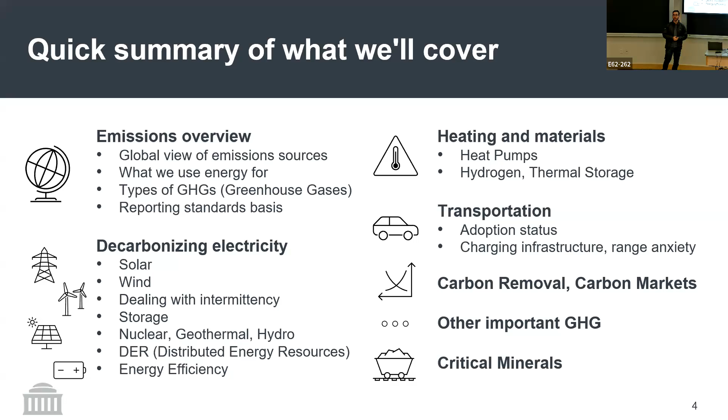And then I'll go into 3 topics that I think are really important. We don't have a lot of time to talk about them, which are carbon removal and carbon markets, then other greenhouse gases, which I think are something that is under-talked about and underappreciated. And then critical minerals, which is something you'll probably hear a lot when you're talking about the energy transition. So first, some context setting.

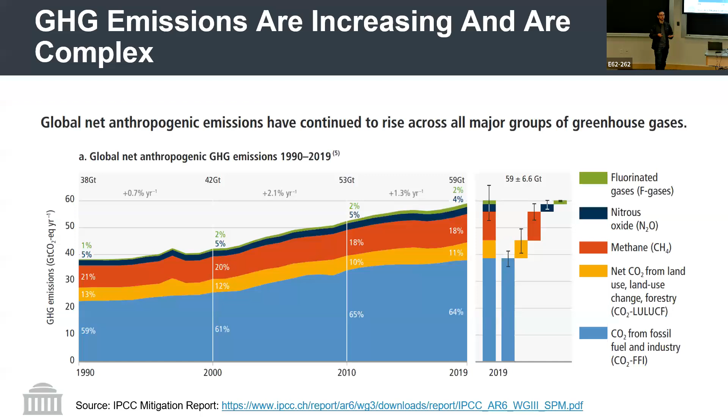So it's really important to get some idea of what we're talking about when we talk about the energy transition and have an idea of scale so that you can say, okay, somebody's talking about kilotons. Should I care about this? Probably not. Or not that much, right?

So it's important to have an idea of where these emissions go. But this is, how do I say this? It's difficult to get one single way of breaking down emissions. So you'll hear different numbers, and if you try to add them up, depending on how it's cut, they don't add up because things that are used for heating then go into industry, so you can double count and so on.

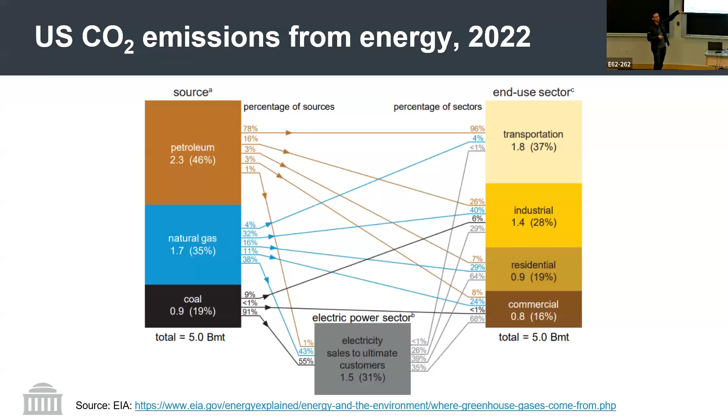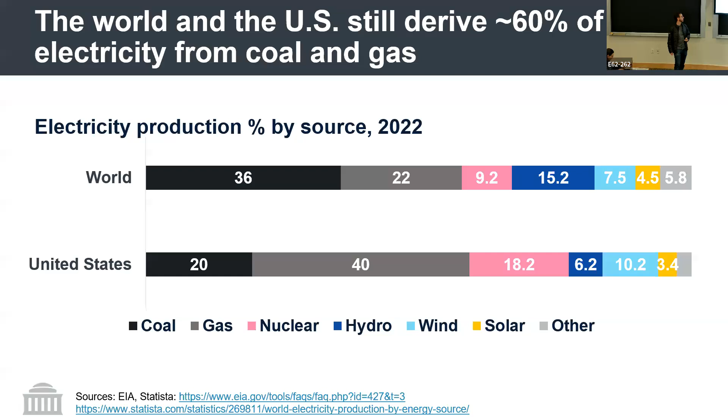Okay, and then one other point that's really important for context setting is understanding scope 1, 2, and 3. And this might be preaching to the choir here, but it's really important for you to have an idea when people talk about scope 1, what does that mean? In general, scope 1 is whatever the company itself is burning. So if you buy gas and you burn it, that's scope 1. Scope 2 is the energy that you buy.

So when you buy electricity, when you buy steam, that's scope 2. And then scope 3 is everything else. And what is everything else? It is if you're a manufacturer and you buy from somebody else, the carbon that's embodied in that stuff that you're buying is scope 3. And then when you sell to somebody else and they use your product and that creates emissions, that's also scope 3. And this is really important, especially for some industries.

So for example, if you think about a company like Exxon or Shell, they sell stuff that other people burn, right? So that's scope 3. So when Shell says that they have a net zero goal for scope 1 and 2, that doesn't really include the biggest source of emissions, which is their scope 3. Same thing for GM. GM might say, we're going carbon neutral, but if they say we're going carbon neutral for scope 1 and 2, then they might still be producing ICEs, or internal combustion engines, which people are going to use and burn diesel or gasoline to run.

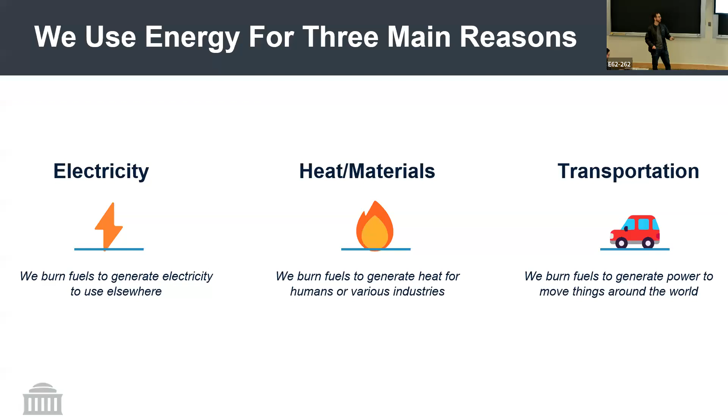Then a ton of CO2 is a ton of CO2, and the difference from a ton of CO2 to a ton of CO2 with an E is that this is CO2 equivalent. So when you talk about methane, you can convert tons of methane into tons of CO2 with a conversion factor, which will depend if you're looking at 100 years or 20 years, but that's another can of worms. But it's important to understand the distinction between the two.

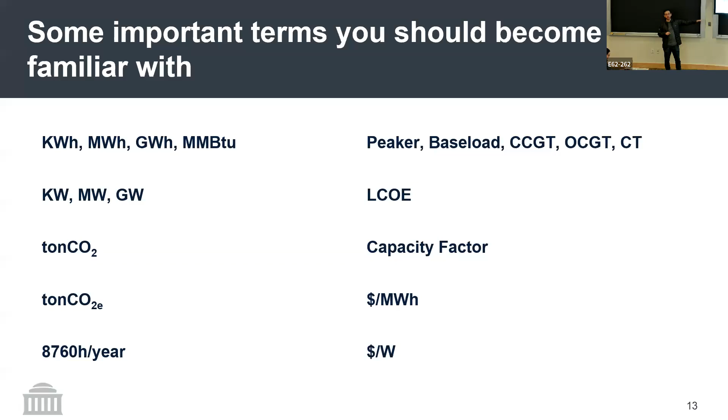And then dollars per megawatt hour, it's important to have an idea of what's cheap and what's expensive here. This is usually LCOE. And then dollars per watt is like, when you talk about solar, for example, you hear that solar costs something like $1 per watt. That's per watt of installed capacity. And then if you want to get from that to how much electricity is being produced, then you need the capacity factor. So anyway, that was very fast, I know, but these are terms that you probably are going to hear a lot about, and it's helpful to have an idea of what they mean.

Okay, so going into solar. And this jacket is warmer than it looks.

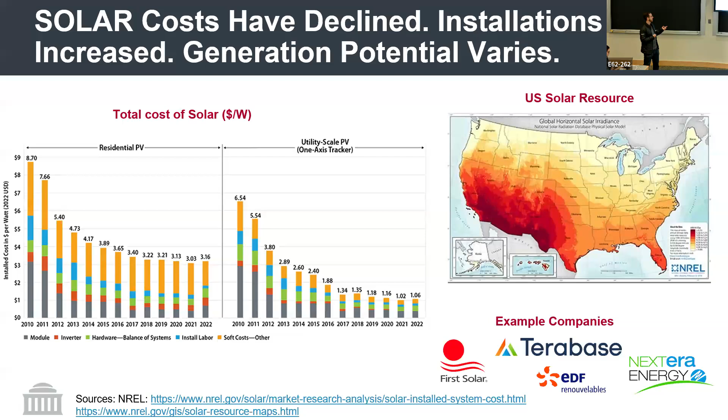And then what you do is you levelize this cost. It's going to cost about $1 million. So you levelize the cost, it's going to be probably about 100,000 per year. And then you divide one by the other. You get to an actual cost, cost per megawatt hour. And then cost per kilowatt hour is 1,000th of that, right? So this is equivalent to like 10 cents per kilowatt hour, is the same as $10 per megawatt hour. Sorry, 100.

Okay. Yeah, you talk about solar in dollar per watt because you can put it in multiple places. In Boston versus California makes a big difference. For wind, you only put it where it's cheapest, so dollar per kilowatt hour makes more sense. Yeah, because for wind, I'm not going to talk about this, but wind is proportional to the wind cubed. So the difference between a place that's a little windy and a place that's more windy is very big. So that's why it's white here.

So the US has 3 regions where you can do wind, basically. There's the wind belt here. That's the greatest wind ever. Really, really good, really, really cheap electricity, but there's basically nobody there. So then it raises a problem with getting this energy from here to where a lot of the demand in the US is, close to the coast. So there's a huge problem with that. Texas is probably a great example because they built a lot of transmission to get this really good wind from the panhandle here. And as a result, about a third of all the wind in the US is in Texas.

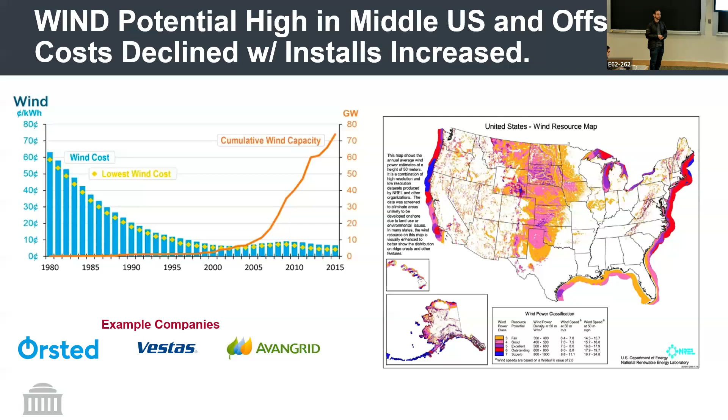The other 2 regions are by the coasts. And the difference here is the East Coast has really shallow waters, so you can do offshore wind more easily. So most of the offshore wind developed in the US is there. And then on the West Coast, there's also pretty good wind, but then you have to go to deeper waters, so then you need floating wind. And basically the difference is onshore wind is great and it's really cheap. Offshore wind is really expensive, and floating offshore wind is insanely expensive. So it's hard to make the economics work, and that's why a lot of the offshore wind is being driven by policy.

Okay, so you're going to hear probably 100,000 times that the wind doesn't always blow and the sun doesn't always shine. Seriously, it bothers me. And there's a lot of ways to deal with that, right? So here I'm mentioning a few. Load shifting or demand response is basically you pay somebody to not use electricity when you don't have electricity. So for example, if you're in California, you charge your car during the day, when there's a lot of solar, versus during the night, when there's not. That's probably the cheapest way that you can deal with intermittency. But it's hard because then you need people or companies to change their behavior, right? So you have to really incentivize them to do that.

Then there's storage, obvious, right? You have a battery or you have a pumped hydro plant, you store electricity for when you need it. And I'll talk a little bit about that. There's transmission, which is great and impossible to build. Seriously, really, really hard. Because in general, people don't want it near them. And even in very rural areas, there's a lot of resistance to that. So you're going to hear a lot about this as well. NIMBY, not in my backyard.

Then you can have dispatchable or firm resources, and this can be a lot of things. One, it can be just keeping some of that gas for running 5% of the time when you don't have electricity. It could be having nuclear or geothermal, and I'll talk a little bit about that. Or in the limit, it could also be making hydrogen and then burning it, but that's currently really, really expensive. And then the last one is just overbuilding the renewables, right? A lot of people talk about renewable energy being curtailed as if it's necessarily a bad thing, but it can be a normal thing, right?

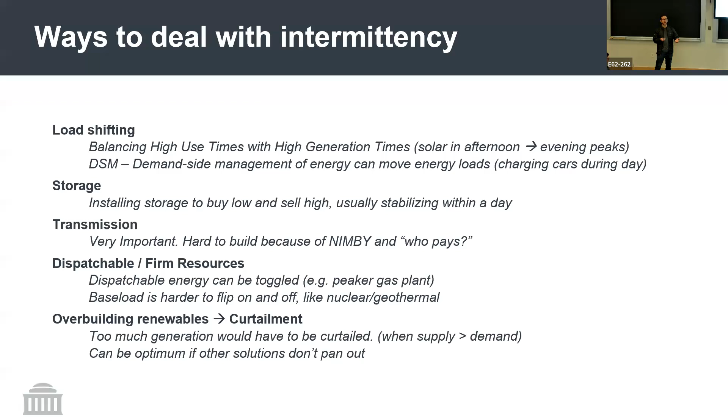Because if you have a grid that's fully decarbonized, it might be better for you to build a little bit more solar and just curtail it at some times, and then you have enough for when you need it.

Right, so going a little bit into storage, storage is very important and it's being deployed a lot right now. And there's 3 technologies that are widely deployed. The first one, where most of the deployment today is happening, is lithium ion. And this is mostly LFP, or lithium iron phosphate, which, important to understand, has no cobalt. When you hear about the whole cobalt thing, that's with another lithium ion chemistry that's usually used for cars. So I'll talk a little bit about materials later.

Then there's pumped hydro, which is interesting because most of the pumped hydro that we have was built in the 70s and the 80s, actually to accommodate nuclear in the grid. And pumped hydro simply works: you have a reservoir in the bottom, you have a reservoir up a mountain, and when you have excess electricity, you pump water. When you have a need for electricity, you let it go down and spin a turbine.

And then there's compressed and liquid air, which are smaller right now, but are promising technologies, and there are some pretty big batteries that are built with this. And basically what you do is kind of obvious. You compress air, and then you let it run through a turbine when you need electricity. And liquid air is pretty similar, but you cool it down enough so that it's liquid, and then you need a lot less storage versus compressed air for the same amount of electricity.

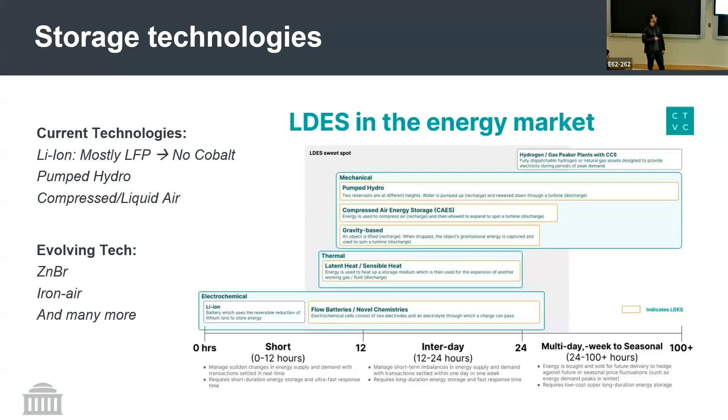Cool. Then there's firm carbon-free generation. And here there's basically nuclear, geothermal, and hydro. Nuclear is great, and we should definitely keep the nuclear that we have going. But building new nuclear is crazy expensive. So there's people developing new technologies that they say could become cheaper. And that's to be seen if that's going to work or not.

The challenge here is also that it takes a very long time. There's a huge amount of regulation around nuclear. So even if this tech works wonderfully, it will probably be another 10 years before we actually see one of these. But there are some really cool companies working on this stuff.

Then geothermal: basically the core of the earth is really hot. So if you dig a hole deep enough, you're going to find hot stuff that you can use to produce electricity.

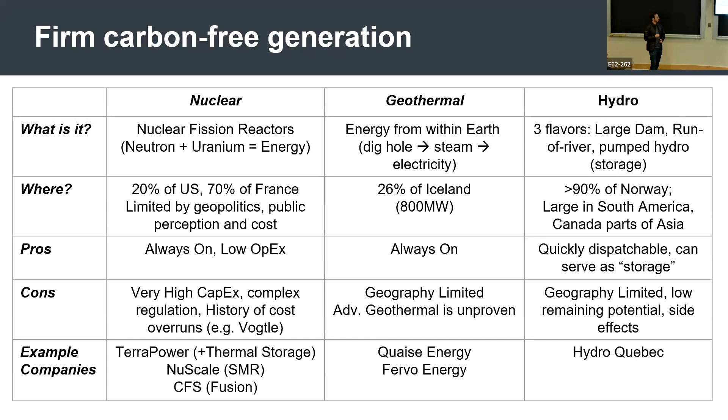And then there's also run-of-river that's relatively new. So instead of building a huge dam that floods a big area and you have to displace people, you just let the river run and do a bypass. But again, most of the resources are already tapped into. Okay, so now, like this is a lot.

And this is important because you're, again, going to hear a lot about technology. And it's important to set the context where having new technology is really important. So it'd be great if we get cheap nuclear. But it's very unlikely that we won't need a lot of solar, wind, and batteries. So we should definitely start building now. So that's the main message that I want to convey here: we definitely need to be building faster.

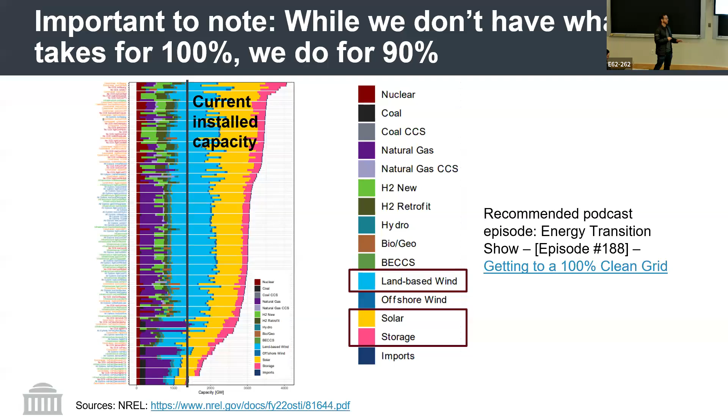Okay, and then just to mention this so that you know that this exists, when people talk about DER, that's distributed energy resources. And this is as opposed to the traditional grid, quote unquote, which is you have generation, then transmission, then distribution, and then you get to customers. That is the way that the traditional grid works. And with DER, you enable the customers to also produce electricity or to also have energy resources. So that can be a battery or something like that, which integrates to the grid as a whole.

Well, 2 points here. One, people talk a lot about this with the advantage of giving power to the people and enabling them to have ownership on this. There's also arguments to be made on resiliency and so on, and then fairness. But one challenge is that in general, things that are on the customer side are more expensive, right? So just because of economies of scale, if you put 5 solar panels, it's more expensive than putting 50,000 on a field. So that's a challenge that needs to be overcome.

And the other thing is finance, because financing a small installation is generally very hard, because how do you get assurance that the person is going to pay you? So a lot of what's being deployed right now is with richer people who have the money to install this themselves.

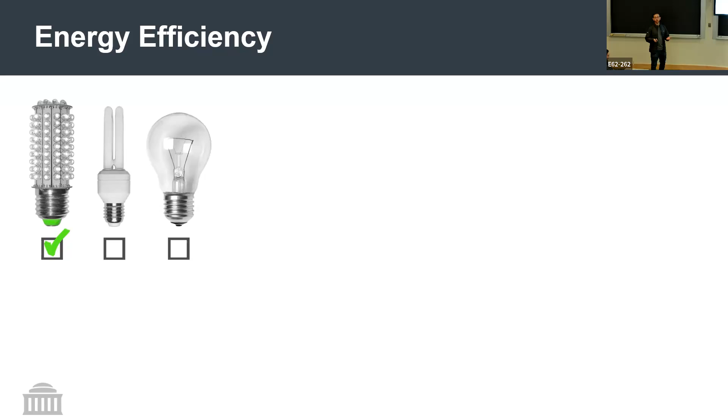So it annoys me a little bit. A lot of the lights at MIT are fluorescent light bulbs. And that goes to show that it's hard, right? It's hard to get people to change. And even when it's an institution that has a lot of money and goes to decarbonize, it's still not something that's automatic, right?

And then there's also things like revolving doors. I'm excited that they're back to work here, they weren't last year. And double pane windows and heat pumps, things like that. That can all increase efficiency of houses, and it's really, really important to move to these solutions. And then the last point that I'll mention on energy efficiency is the behavioral side of getting people to change. That's really, really hard.

So getting people to turn off their AC, or if you're going to buy a vehicle, it's much better if you can drive a smaller car. When I got to the US, I was shocked at the size of cars that people drive here. But one thing that I was also shocked by is that a lot of this is actually driven by policy and by regulation. For example, if you have a pickup, you can get some tax deductions that you can't with a normal car. So that's one way that the government is actually nudging you towards buying a pickup instead of a normal car, because then you can get more tax deductions, right?

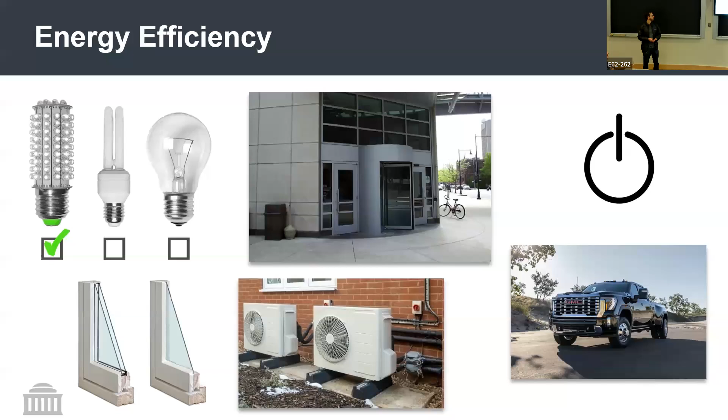And then there's a lot of things like that where you make fuel standards, but then the fuel standards are relaxed if it's a bigger car. So there's one component that is customer preference and what people actually want. That's really hard to change. But then the other thing is, what's the regulation trying to get you to do? Right?

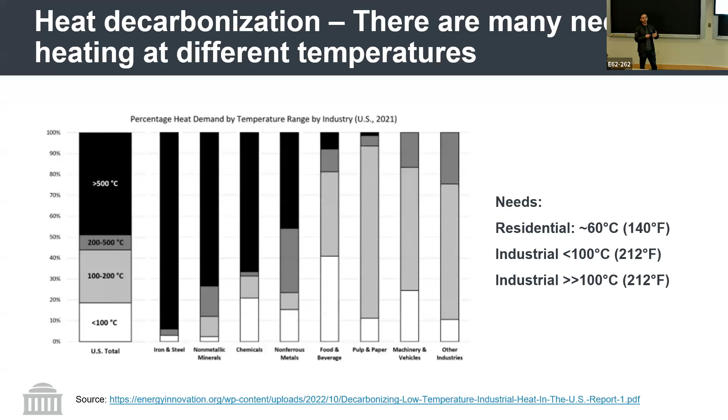Okay, so moving on to heat and materials. Heat is a huge part of emissions. And what's important to see is that there are different temperatures that you need. Here it's broken down between less than 100 C, which is boiling water, and then 500 C, which is maybe 1,000 degrees Fahrenheit. And you can see that for industries, you need a wide range of temperatures, and there are different solutions that work for each of these temperatures.

So here I'm breaking it down by big numbers. Heating for very low temperatures, like heating a house. Then high temperatures, which is a lot of industrial processes, and then very high temperatures. In general, for low temperatures, you should 100% be using heat pumps. And I'm mentioning this on purpose. COP is coefficient of performance, which is a measure of efficiency. It's basically how much heat you get out divided by how much energy you put in.

And because of the magic of thermodynamics, you can actually get more heat because you're taking heat out of the environment. With heat pumps, you can get more heat than you put in as electricity, which is great. But that doesn't work out for very high temperatures. Then there's resistive heating that has a COP of 1, right? You're just running electricity through a wire. You should probably not do that for low temperature heating, but for high temperature, it's kind of what you can get.

Then there's hydrogen, and a lot of people say that hydrogen is really good for industrial processes because it can get to very high temperatures, which is difficult to get with other technologies like resistive heating. Then this is probably my favorite one, which is... oh, yeah. What's the difference between blue and green?

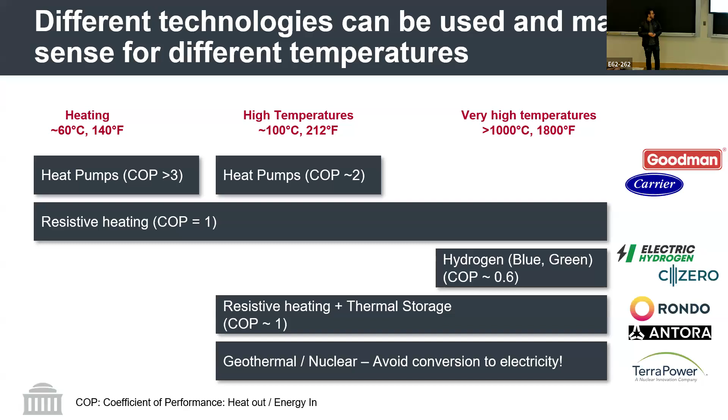And there are some companies that are looking into maybe not using a carbonate, or you can do the same process but then capture the CO2, or you can mix the CO2 back into the oxide, and capture some of that CO2 into the material.

Then there's steel. There's Boston Metal, also very close to here, which is really, really cool. They're trying to do direct electrolysis of the iron oxide. So you heat it up, and then you run electricity through it to produce steel versus the normal process, which uses coal. And then there's aluminum and ammonia. For aluminum, you need a lot of electricity. So that's the main point. You need green electricity. And for ammonia, you need hydrogen. And the hydrogen, again, is produced from natural gas.

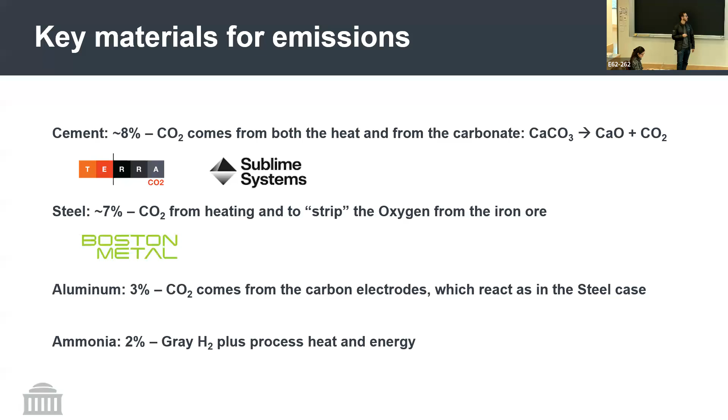And a few things to realize here. One, planes and ships, we have no idea how to decarbonize. That's the reality. There's no economic way today to run this. You would need huge subsidies to make this work. And the challenge is, usually you need very big distances, so you need a lot of energy, and then it's really, really hard to get that much energy from renewables.

So what you could do is maybe do hydrogen and then do CCS and then produce a synthetic fuel that replaces the normal fuels, but that's really expensive. So that one is very, very hard to figure out. Maybe you can do nuclear ships, so that's exciting, but we'll see.

For cars, though, we definitely have a solution. That's pretty obvious. EVs. Some people are still trying to do hydrogen cars, which is a crazy thing. I do not understand why. Because, I mean, from a cost basis, EVs are just better.

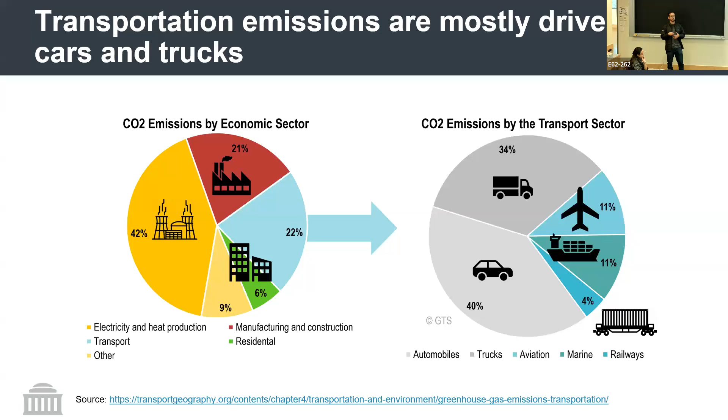For trucks, sorry about the rant. For trucks, that one is really hard still. You can do a truck EV. The challenge is that in general, batteries are really heavy, and the further you need to go, the heavier they become. And for trucks, the weight is really, really important, because how much weight you have determines how much you can carry, how much money you can make.

So just going over quickly to EVs, two things important. A few countries in Europe are really adopting EVs very fast. China is surprisingly adopting EVs like crazy. If you look at China, about 22% of cars being sold there are EVs. And in the EU, it's even less, if you look at the EU as a whole. In the US, it's like 7%.

And a lot of it is because of range anxiety. In the US, people really like to travel on the highway system and so on, and there isn't a lot of charging infrastructure. The IRA has a lot of money that's going into that, so that's exciting. Maybe we'll start to see more and more EVs being adopted here.

Nice. Okay. Then going to my others category. The first one is CDR. Here I'm just throwing a bunch of acronyms, and it's important to at least know what these technologies are. When people talk about CDR, that's carbon dioxide removal, which is taking carbon out of the air. There are a lot of technologies that can do that. First one is BECCS, bioenergy carbon capture and storage, which is you burn some kind of plant, and then you capture the CO2 and you put it underground.

Then there's DAC, direct air capture, which is getting CO2 directly from the air and then doing something with it, which is really, really expensive today and needs a lot of energy. So there is a lot of research that needs to be done to get that down.

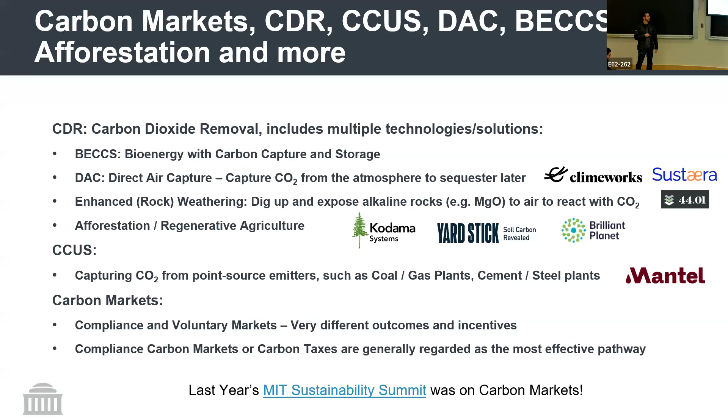If you want to learn more, last year's Sustainability Summit was on that, so you can go see that. Okay. Then there's non-CO2 gases. Three things that I'll say here.

First, methane is really, really, really important, and we talk about it way too little. It's about a third of global warming today, and the good thing about methane is that if you stop emitting it, it reacts with the oxygen in the atmosphere and produces CO2, so it goes away in about 20 years. So it would be great if we did that.

But it also has a lot of sources. And here, the three big ones are fossil fuels. What's the name of this? Like a dumpster? Landfill, thank you. So there's landfills. Basically, when you have a lot of organic matter reacting without oxygen, it produces methane. And then a lot of places you collect that and you burn it, which is much better because then you break it down into CO2, which is a lot less warming.

And then the third one is agriculture. And this is mostly cows, but also rice is a big source. But yeah, cows are huge. I think if cows were a country, they would be the third biggest after the US and China.

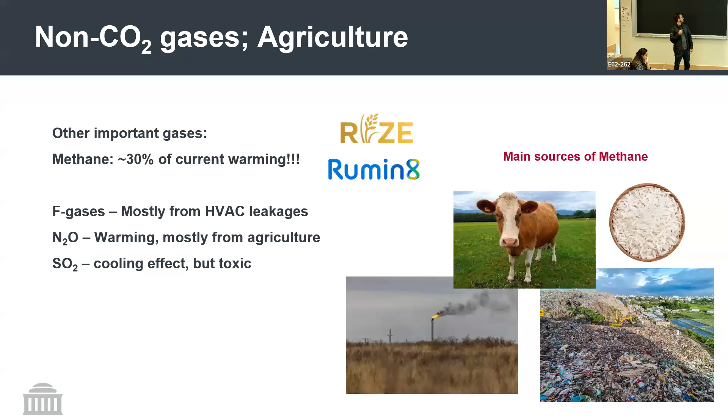And then there's other gases as well, F gases, I mentioned nitrous oxides, and then there's SO2, which has a cooling effect, but it's toxic, so not great. Thankfully, we're getting away from this. This is mostly coming from coal and high sulfur petroleum, which some ships burn. But there's fuel standards to get that out.

Okay, and then there's materials, which is, again, a whole other can of worms. There's a ton of materials that are really important for the energy transition. I'm mentioning a few here that you'll probably hear more about. Copper is used for basically everything that has wires in it. Lithium, cobalt, and nickel are materials for batteries, and cobalt is really bad because it comes from the Congo and there are a lot of human rights violations there, and it's basically only in the Congo that you have cobalt, so that's kind of terrible.

Yeah, so all these three are really important. I mentioned lithium iron phosphate. You can do EVs with that, and mostly in China they do, but they have a smaller range. So that's why a lot of the batteries that are built for EVs in the US are with these three materials. And then there's aluminum, which is used for everything from EVs to planes.

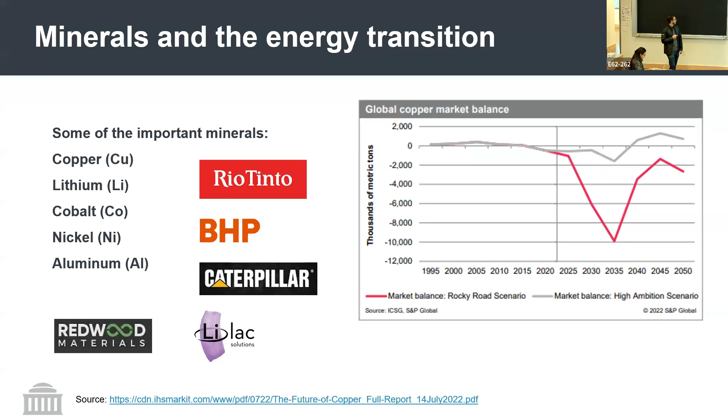Thanks so much. That was very helpful. I'm just wondering if you could talk a little bit more about storage. I don't understand how much of the energy that you create do you lose when you store it? How does that change over time? And are we getting better? Yeah, that's a great question.